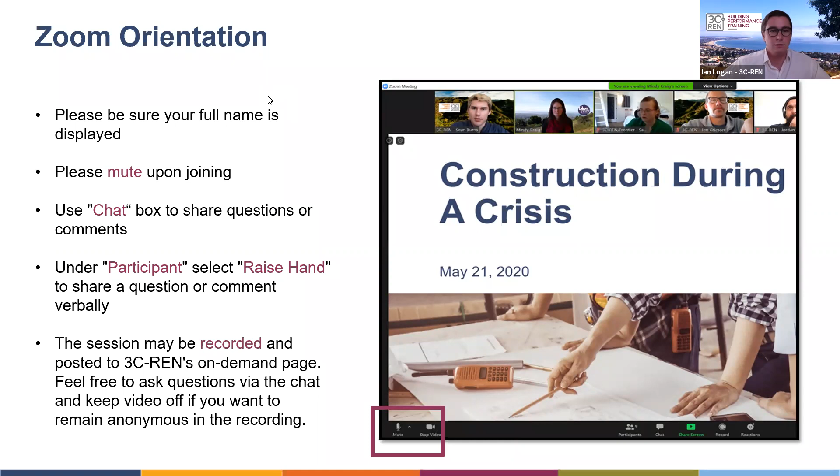Oh, I think, yeah, there are a few boxes that come through.

So just a few words about who we are. The Tri-County Regional Energy Network, also known as 3C-REN, is a collaborative partnership between San Luis Obispo, Santa Barbara, and Ventura counties. Our purpose is to improve energy efficiency in the region by offering free programs and services for all building professionals and households. 3C-REN is funded by ratepayer dollars that we all pay into through our utility bills via the public goods charge. The benefit of being ratepayer funded is that there's no cost to those we serve, and as a regional energy network, we're able to return those dollars back to our local economy, which has historically missed out on some of these funds.

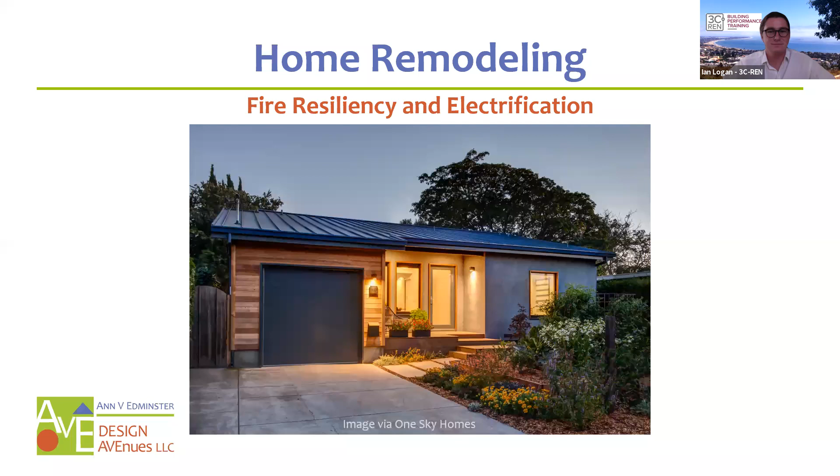So first, I would love to know who's in the audience. I know several of you. Welcome, friends. Ian, I think, will run this poll so we can find out who all's here.

Oh, you guys are quick. That's great. Okay, looks like almost everybody's voted. Some of you are trying to decide what you are. I can relate to that. Okay, we can call it here, I think. So interesting, we have a mix. Share results. Okay, I guess those are being shared. So about evenly split between homeowners, general contractors, architects, and others. Ian, do we have any answers in the chat box saying what the others are? Let's see, I don't see anything now. Okay, so we have mysteries. That's okay, maybe we'll find out more as we go.

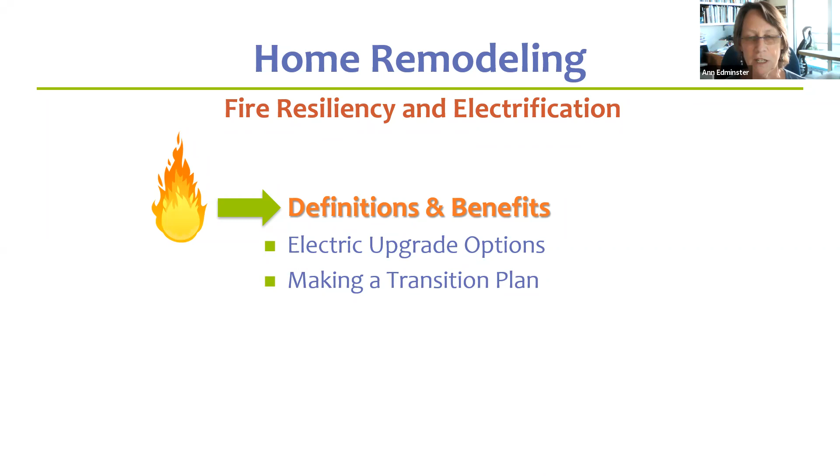Okay, so moving right along, thank you for filling me in on that. I've got three sections here this evening: first on definitions and benefits, then on the electric upgrade options, and finally making a transition plan. The second and third sections have a little bit of repetition in terms of the themes, but I'm giving more tips in the final section about the process. So that's the main distinction here.

So finally, it's late in my day, definitions. Electrification, what we mean by that is transitioning away from appliances and equipment that are fueled by natural gas or propane. You'll note that I've put 'natural' in quotation marks. It turns out that the terminology natural gas has really been used primarily by the gas industry to purvey the idea that this is something healthy, like natural foods.

Many of you probably realize that natural foods is a somewhat nonsensical term because there's no regulation around it. It's used to convey an idea without anything really being attached to it. There's no legs to it, no teeth to the definition. So the gas industry has really used this to purvey the notion that this is healthy, and what we know now is it's actually quite unhealthy.

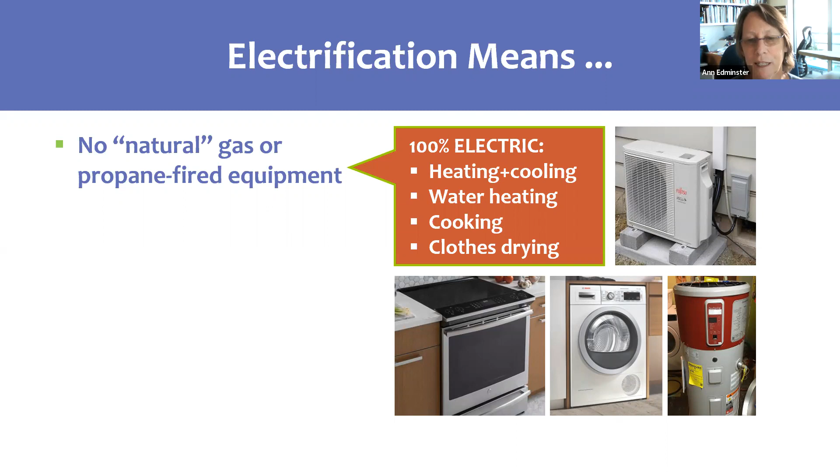So when we talk electrification, the four main uses in homes that we're talking about converting are heating with electricity, which generally means we're able to cool at the same time, water heating, cooking, and clothes drying. We'll be walking through all of those.

The benefits of electrifying are numerous. First, we're decreasing indoor air pollution substantially, reducing kitchen safety risks.

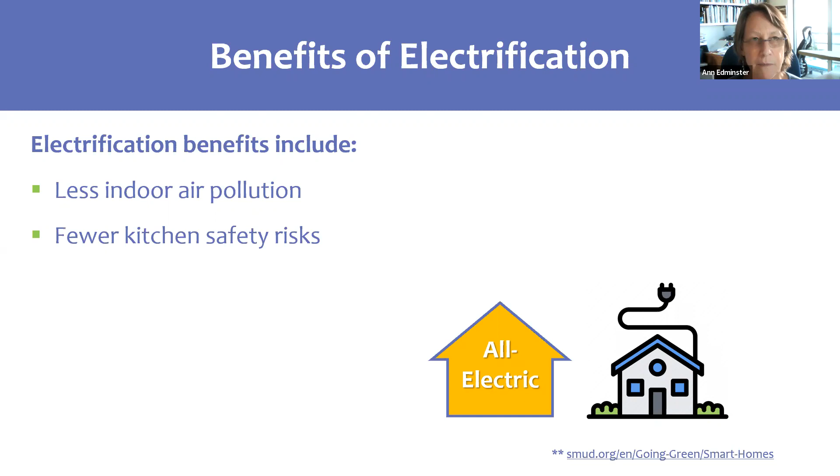Actually, my son came home from his job yesterday. He works with young people with special needs in their homes, and they had an episode where an older gas stove had been used and not completely turned off. Everyone went outside for a while, came back in after 20 minutes, and the whole house smelled of gas. It was pretty scary, and that would not happen in an all-electric kitchen.

There are numerous other kitchen safety risks that are reduced by going electric, and I'll probably talk about those multiple times because it's really a favorite theme of mine in the arena of electrification.

Improved equipment: anytime we're replacing older equipment with new, generally the equipment comes with newer, improved features, often with improved efficiency as well as better safety and many other nice things. Usually there are aesthetic improvements, controls improvements, features, and so forth.

I remember in my older home, when I first moved in well over 30 years ago, about 35 years ago, it was equipped with definitely older appliances. I celebrated the death of each one, because then I got to get something new that had many more features I liked.

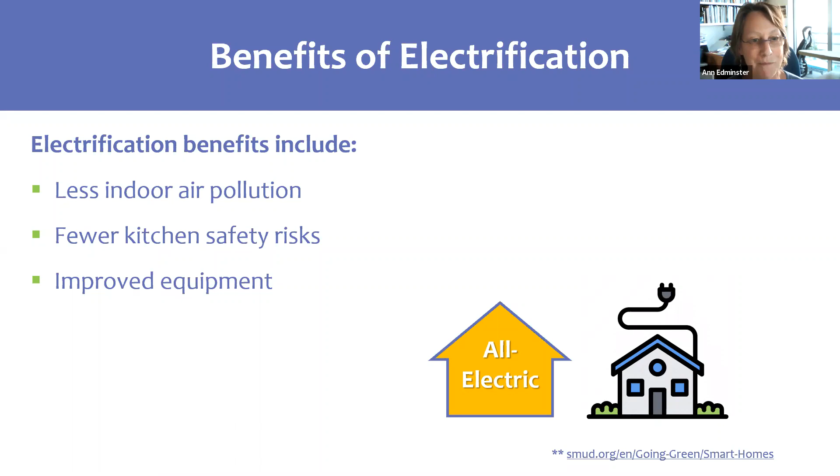This is certainly not the least important, although it may affect us in the most indirect ways: reducing greenhouse gas emissions is a big point of this, and it's why it's of such interest to 3C-REN and many of us, as we are in a climate crisis, as I'm sure you all know, all looking to find ways to improve our climate profiles. So an all-electric home is not an insignificant way to address that.

Going to an all-electric home means emitting about 40% less greenhouse gas than an equivalent home powered by natural gas. This research comes from SMUD, the Sacramento Municipal Utility District, which is one of the agencies within the state doing some of the most progressive work in this area. They've got a bunch of great resources, and the link is on this slide.

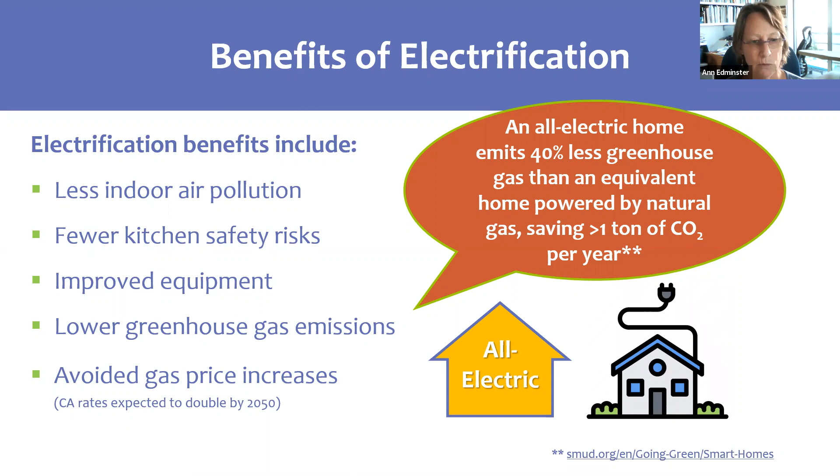What that's going to mean is less and less provision and maintenance of natural gas infrastructure, and the state will be diverting more attention toward electrification. So with fewer customers on gas, that means fewer people sharing the cost of maintaining that very expensive infrastructure. Really a critical piece of that.

Now, before we move into other specifics about electrification, I wanted to talk about efficiency. There are several reasons why efficiency is ideally, and whenever possible, a precursor to going all electric. We'll talk a little bit about that and its benefits.

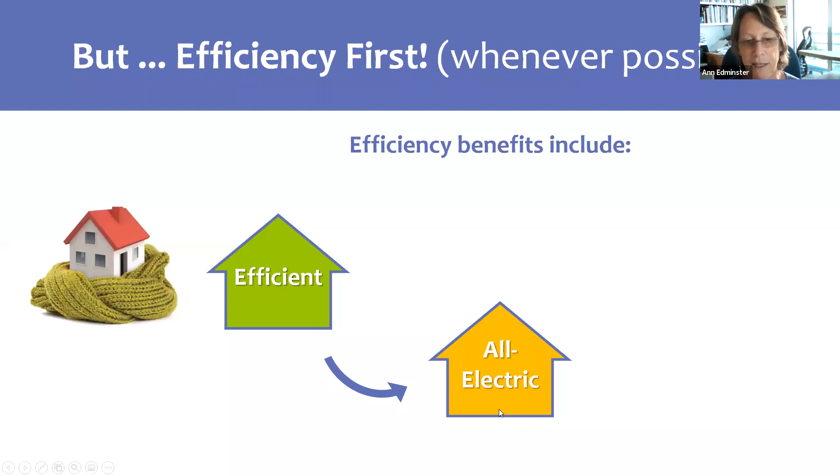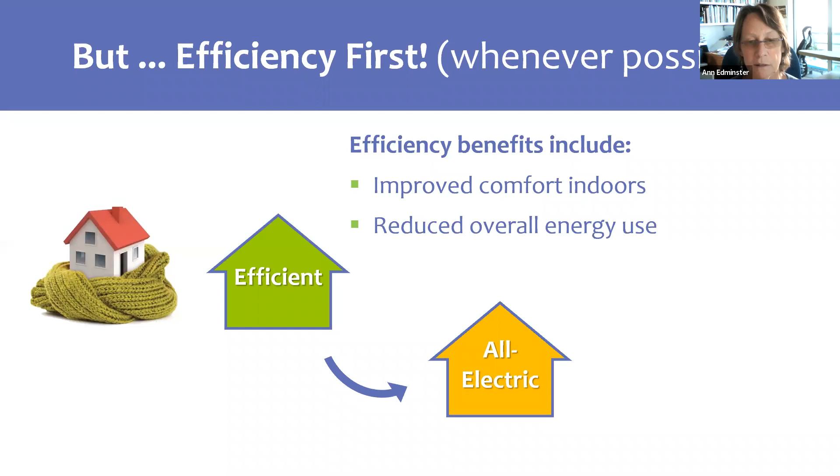First is improved comfort indoors. Whenever we make a building more efficient, particularly the enclosure features, we are improving indoor comfort, temperature stability, and so forth. We're reducing overall energy use, which brings costs down. And as I mentioned, with the inevitable electric rate increases, it's important that we don't just shift our energy use from one fuel to another, but also reduce it, because electric rates are typically higher than gas rates.

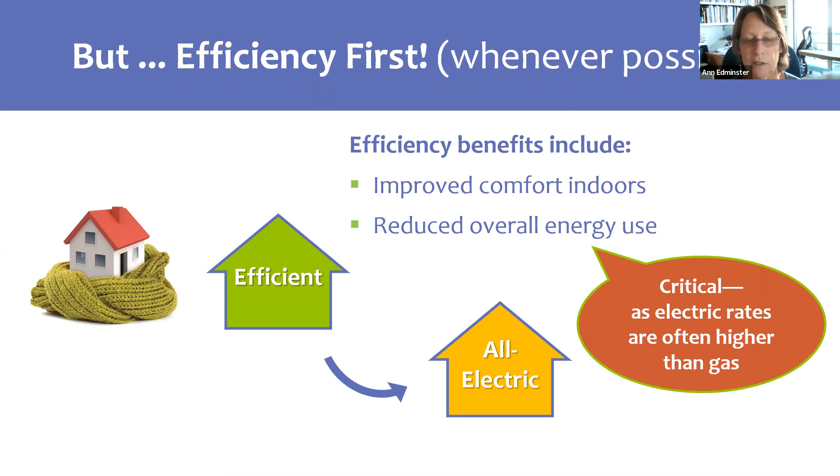So what we want to do is shift from one fuel to the other and at the same time reduce overall usage so that we don't experience adverse rate increases. And then the other really important aspect of efficiency is it improves resiliency.

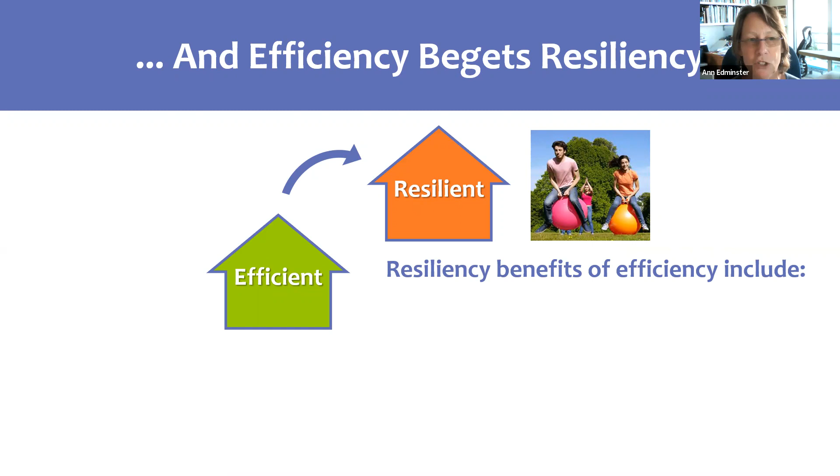So what do we mean by resiliency? It isn't playing in the park, although that's lovely. The benefits of efficiency that bring with them resiliency are stable indoor temperatures, which I already mentioned. Very important, particularly during power outages, which have become a feature of life for many of us here in fire-prone regions of California. And this is not just comfort, it's also a life safety feature, because with our increasing extreme temperatures, many people who have health challenges, who may be elderly, the very old, the very young are particularly vulnerable to extreme temperatures, as are those with health challenges. So this is not an insignificant thing.

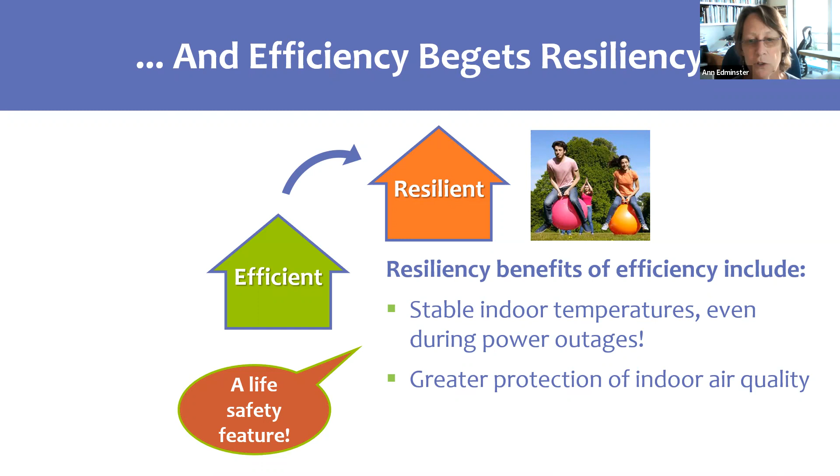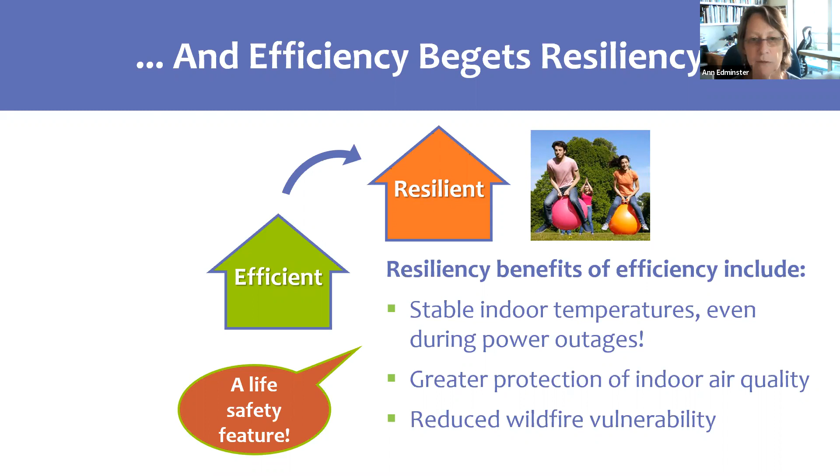We're also again providing protection of indoor air quality. The efficiency measures that we employ on the enclosure mean less intrusion of wildfire smoke or other types of air quality problems that occur on the exterior. There are also enclosure improvements that reduce not only the wildfire smoke intrusion, but the risk of wildfire per se. So I'll be going into several of those things right now.

This is a vintage 1970s home that was not constructed with a lot of attention to, honestly, either aesthetics or durability. The good news about that is when I was doing a lot of remodeling design, I used to tell my clients, think of demolition as opportunity. So when we see deterioration and things that need to be upgraded for a variety of reasons, they often open up opportunities to do things that have multiple benefits.

So in this particular case, the T111 siding is in very poor condition from nearly a half century of exposure to UV and driving rain and wind and so forth. So the owners are up for replacing that siding. Taking off the siding gives us the opportunity to air seal, which again is both a thermal benefit and a wildfire protection benefit, again, mostly smoke.

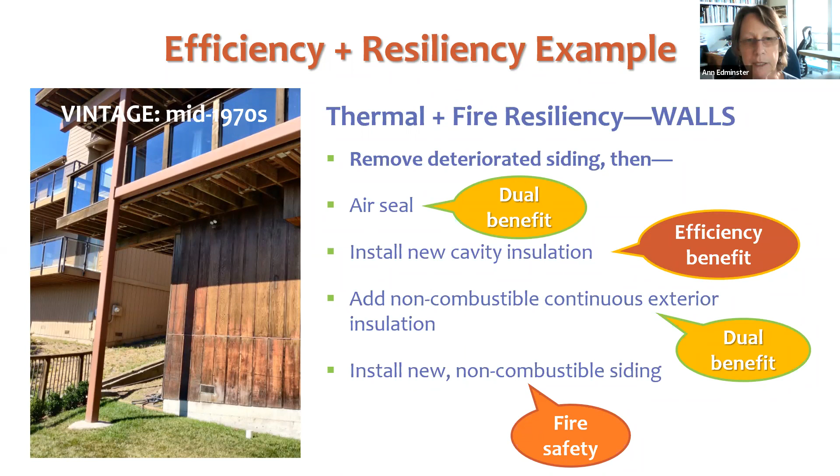A little bit more in the enclosure, we're also looking at the glazing here. In this particular home, there was a combination of single pane glass and dual pane glass. However, even the dual pane glass, these were not thermally broken units, and they're pretty aged and are not well fitting within the window rough openings. So there is air leakage, which again means smoke leakage.

So this homeowner is in the fortunate position of being able to afford window replacements, and so that's what's happening. All of the windows, even the dual glazed, are being replaced with dual glazed tempered wood windows that are clad with metal for durability, and all of them have compression closing.

So the dual glazing is both a thermal benefit, which probably you all know as compared to single glaze. What you may not know is that dual glazing also is more fire resistant than single glazing. Tempering the glass, particularly both panes, further increases fire safety. And then avoiding vinyl in particular is important for fire, because vinyl in the face of fire melts and deforms, and the deformation not only destroys the windows, but again allows heat, smoke, and flame intrusion.

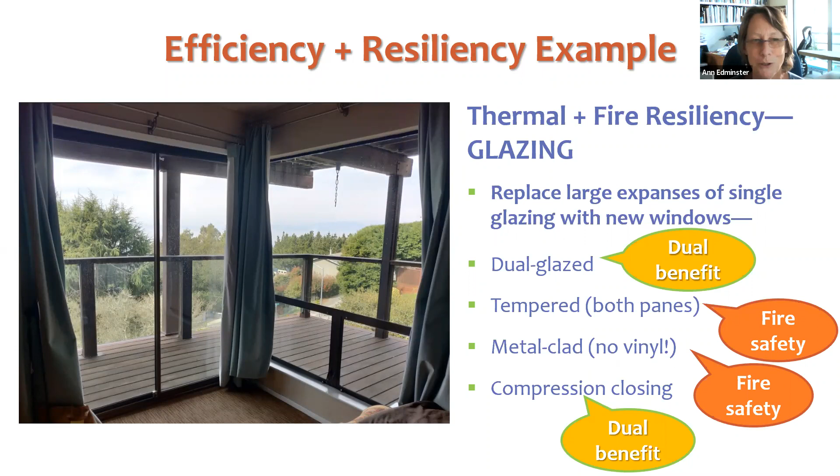So that's a little tutorial on glazing and why it matters from both a thermal and a fire perspective. Time for some water.

Yet another aspect of the enclosure that we can improve is the venting. In this home, we're going to be eliminating the vents both in the roof and the crawl space. This, again, is a dual benefit—you'll hear me singing the same song over and over again. It improves the thermal performance of the home, and it also reduces the opportunities for the intrusion of smoke, embers, and flames.

When we convert a crawl space, basement, or roof from a vented to an unvented space, what we need to do is actually change where the insulation occurs so that the enclosed space is now insulated. In the attic, we move the insulation from the ceiling plane up to the roof plane. In the crawl space, instead of insulating under the floor, we insulate the crawl space walls. What we now have are what we call semi-conditioned spaces—we're not directly heating or cooling them, but they'll inherently be cooler in the summer and warmer in the winter than when they were uninsulated.

This makes them really great places to put heating and cooling systems, which will perform a lot more efficiently than they would have previously in those uninsulated spaces.

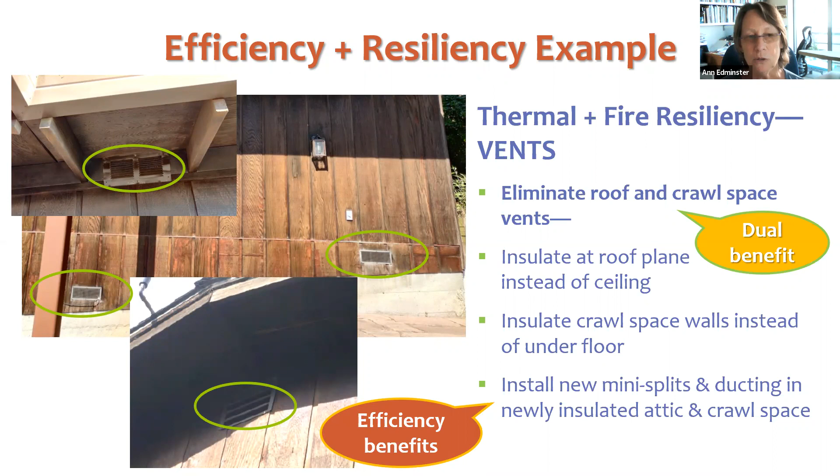At the same time, an additional goal for this homeowner was to electrify. We're replacing their existing natural gas water heater, which was in the crawl space, and their existing natural gas furnace, which was also in the crawl space, exposed essentially to exterior temperatures and therefore really compromising performance. We're putting in new mini split heat pumps—one in the crawl space and one in the attic with the ducting. They'll all now be in this semi-conditioned space and operating much more efficiently than their prior counterparts. There are a lot of synergies in looking at these systems together and seeing what the opportunities are.

Moving beyond the enclosure to ventilation as distinct from venting: venting is basically poking holes in things and letting air move in and out. Ventilation is actually thinking about how we supply fresh air for us to breathe within homes. This is often a source of confusion for homeowners.

Another opportunity afforded by creating these new semi-conditioned spaces is to put in ERVs, energy recovery ventilation systems, or HRVs, heat recovery ventilation systems, into these newly conditioned spaces. This is very important because now we can provide filtered fresh air rather than incidental or unfiltered fresh air, which is what we often get when people say, 'I can just open the windows to get fresh air.' Well, not in smoke season, you can't.

We're finding more and more people interested in active ventilation systems than ever before. One concern that often arises is: if I'm running a pump to move fresh air in and out of my home, doesn't that have an energy penalty? But it's not what you might think, because in our older, less airtight homes, we've been getting air movement between interior and exterior by passive, unintentional means.

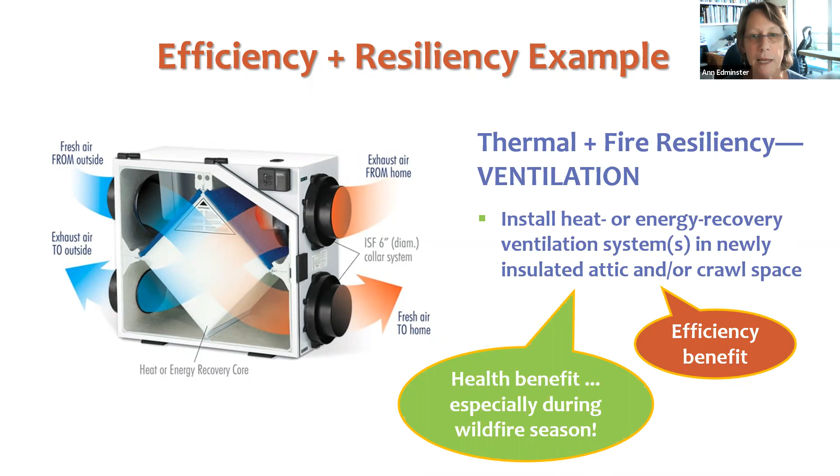In our older homes that were not air sealed, there are lots of small, sometimes not so small, places where air is leaking in from the exterior. But we don't know how much air we're getting, we don't know the quality of that air, and we don't know the quantity. So it's not really a great way to provide air for our breathing. This is another opportunity created when looking at these types of retrofits.

We have a quick question from Craig Lewis. He's asking if most jurisdictions allow unvented attics.

That's a great question. They absolutely should, because this is perfectly permissible by codes nowadays. In the past it was more of an issue. There are definitely still building officials and inspectors who are not completely up to speed with unvented spaces. So it's not a bad idea to have a preemptive conversation with your local building department if this is something you're planning to do. If you get any resistance, it's not too hard to come up with supporting information, code sections, and technical resources to make the case that this is not only permitted, but desirable. One really great resource is buildingscience.com. They've got a ton of authoritative information that can be used in conversations with building department folks.

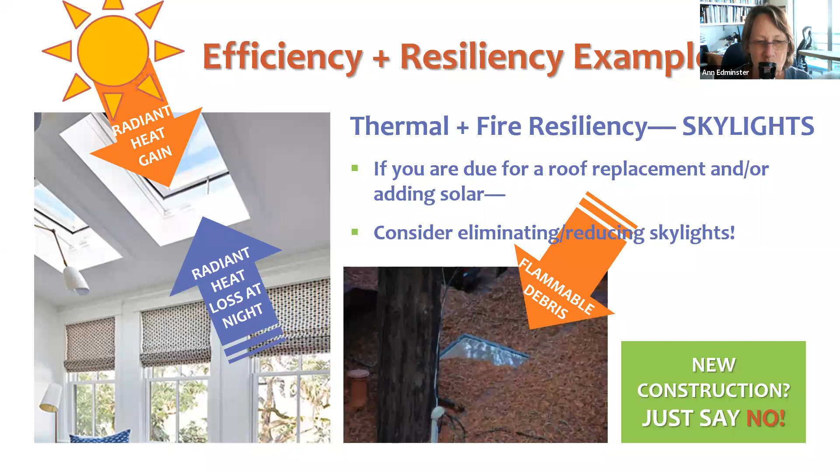I'm wondering if I've got a little air quality problem that's making me hoarse. At any rate, going to an all-electric home also inherently improves resiliency.

So what are the benefits here? We get power restored much faster after outages than with gas fuel. I know some people say, well, if I go to all electric, I'm not going to be able to cook when the power goes out. That may be true. However, when we lose power, we often also lose power to our gas appliances because most of the new ones have electronics so that they can't really be used effectively in a power outage.

Furthermore, when there are the types of emergencies we've been exposed to in recent years, we're often looking at gas shutoffs as well as electric shutoffs. The experience is documented that restoring electric power, depending on the nature of the emergency or outage, can be in the range of a few hours to a few days. The time to restore gas service is in weeks or sometimes months. So again, sort of little known facts about this. When we eliminate gas, we eliminate on-site explosion risks.

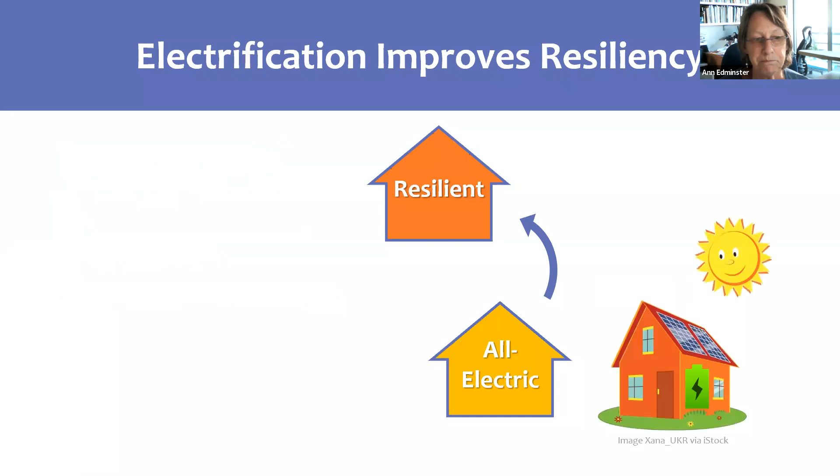If we also include distributed energy resources, meaning solar and battery, that's the optimum combination, because then we have not only utility savings month over month from having those solar resources, but solar also provides an increase in resale value that averages about 4% nationwide, plus clean carbon-free energy.

And with batteries you get power when the grid goes down. Even without batteries, there's often the ability to provide power to limited items within the house just with solar.

Boy, I'm really sorry about the hoarseness.

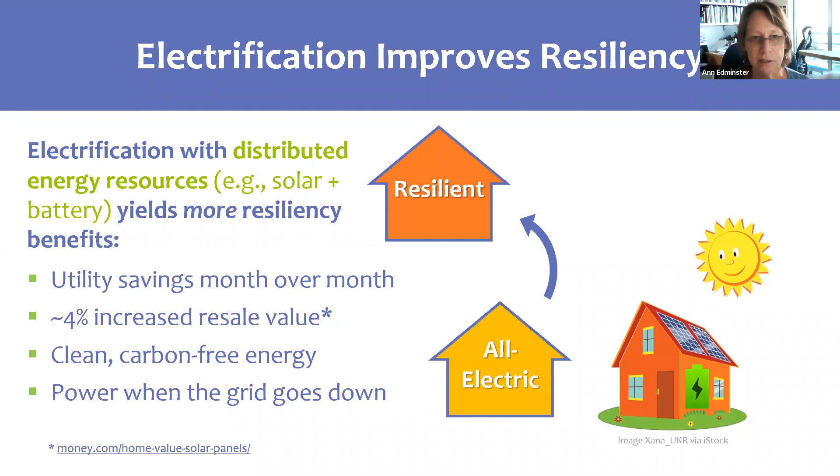This is not fun. At any rate, I think I've shown that there's a real win-win in looking at efficiency, resiliency, and electrification together. So I just really want to encourage that holistic thinking.

Moving on to the electric upgrade options. Before we do that, Ian, are there any other questions that might be addressed before I launch into this new section? Yeah, we have a couple quick ones.

Another one from Craig: is there a significant insulation efficiency difference between roof plane, ceiling batt, and blown attic cellulose?

Great question. Generally speaking, I'm not a huge fan of batts. Not that a good job can't be done with batts, but I'd say batts are a little bit more vulnerable to installation defects that occur primarily from installers being pressured for time and working too fast. And because batts are challenging, they're 14.5 inches wide to fit in framing cavities.

But anybody who's looked at a newly framed house will tell you that the number of cavities actually 14.5 inches wide is quite small, because of all the things being done in home design and building, and also because of disruptions in exterior walls with wiring, plumbing, and so forth. So I'm not a big fan of batts for that reason.

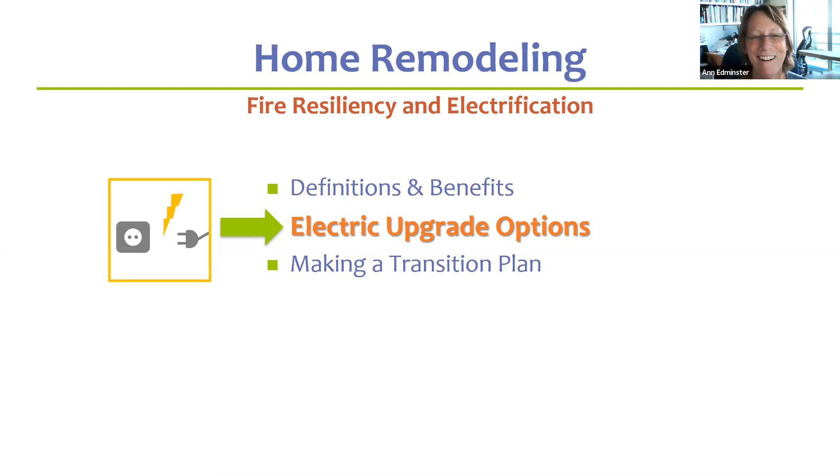So we're looking at the principal systems I mentioned earlier, and a couple of bonuses here too. For space heating, essentially there are two options, both of which are heat pumps.

And of course, when we're talking about electrifying, by definition we're talking about existing homes, since if we're starting from scratch, we're not converting to electrification—we're hopefully going to start with all electric. But that means we're looking at how to get these things installed.

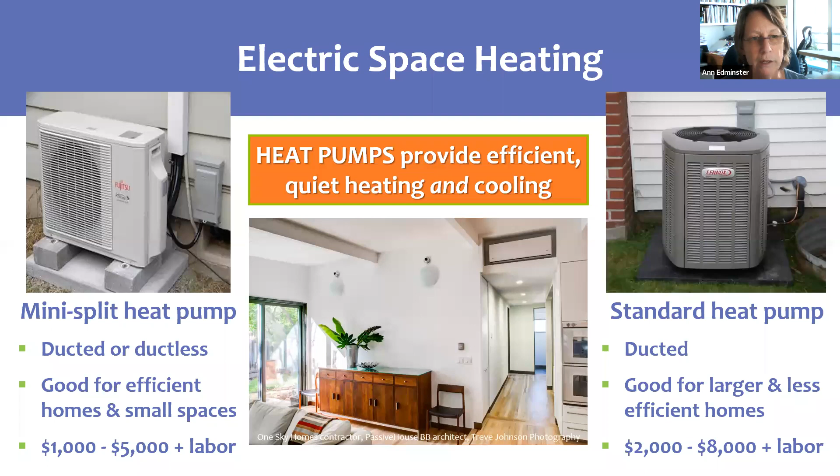Conversions—either option provides efficient and quiet heating and cooling. For a home that's got natural gas or propane heat, we have many of these in California coastal zones where there is no cooling presently, and yet increasing temperatures are causing more and more people to wish they had cooling. So there's a real opportunity to replace a furnace with a device that provides both heating and cooling. So that's our first option, our first piece of equipment.

The tankless is often referred to as instantaneous. This is somewhat erroneous, in that it's only instantaneous or really quick if it's mounted in direct proximity to the place where the hot water is needed. There's a lot of misunderstanding about tankless units on the market. I think they're often viewed as a panacea and sold as an across-the-board green solution, when the reality is they really need to be tailored to the installation.

So if they're installed as a replacement for a tank unit, there can be significant performance challenges if there's quite a bit of travel distance between the tankless unit and the hot water draws. There can be real disappointment when the hot water isn't delivered, quote, instantaneously. The other big deal, of course, is they're much smaller, which can be an important feature that lends them to particular spaces.

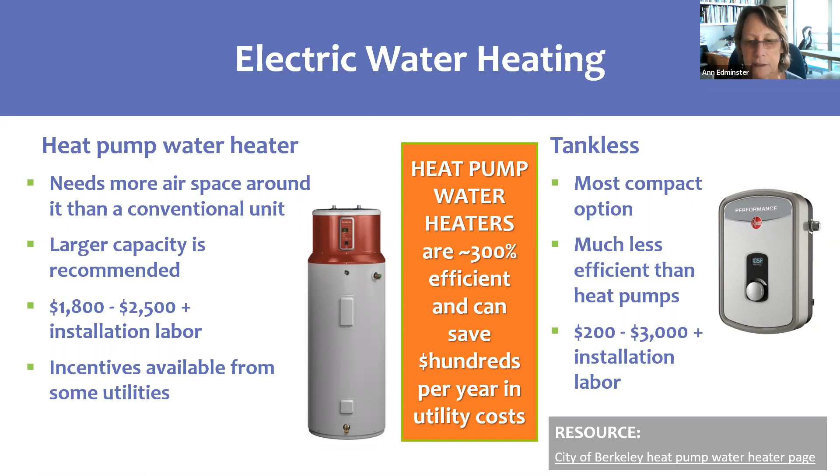Okay, moving on to induction cooking. Now, it's certainly true that a conventional electric range is also a possible swap-in for a gas range, but I'm not even including those, because most people, when you even mention the prospect of cooking with electricity to them, scrunch their face up in a very unhappy expression, because they've had experiences in the past with conventional electric coil ranges, which I don't think too many people really enjoyed cooking on.

So I think this is really one of these, I hesitate to call it a wonder technology, but it really is a quantum leap beyond prior home cooking ranges. So I'm a big convert, you maybe got that idea already. I've been cooking with an induction range for the last 2 years and will never go back.

Of course, my primary motivation was because I wanted to be in an all-electric, emissions-free home. But I've also been really excited and not ever remotely disappointed with it, because it's so much cleaner, so much safer, way less air quality problems, better controls. There's a cooler kitchen and cooking environment that comes with this. So there's absolutely nothing bad to say about this.

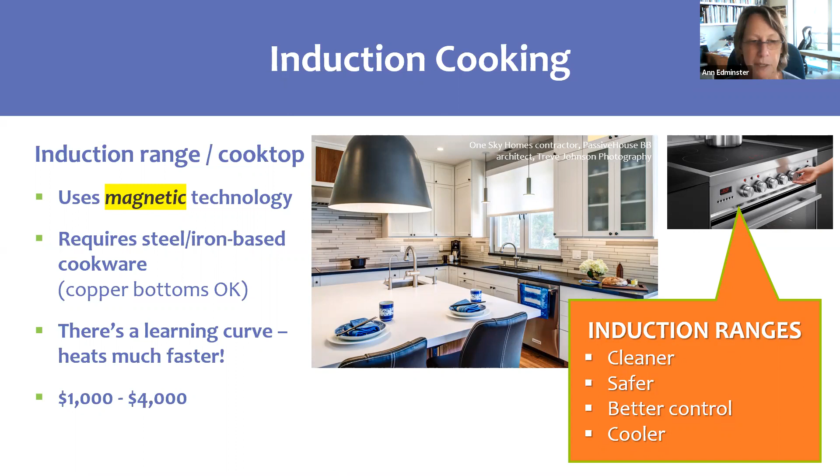Whereas on our older ranges, they're not nearly as responsive, so it's a lot harder to say, well, did I get the right setting? Did I drop it too much? Did I not drop it enough? So anyway, I'm a big fan. And in the last few years, 2 or 3 years, Consumer Reports, of course, reports on ranges. In the last couple of years, all of their top marked ranges are induction. So that'll tell you something about the general state of the art in cooking technology.

Moving on to clothes dryers. Once again, we have 2 options available to us, a standard electric and a heat pump. Standard electric behaves pretty much exactly as you would be accustomed to with a gas dryer. And a heat pump, same basic behavior, except that with the heat pump technology, it's quite a bit more efficient, so uses about half the energy.

However, there is a corresponding increase in drying time. On the good news side of that, that means it's using a lower heat, and so that's gentler on clothes. So if there are a lot of delicate clothes being used in your household, then that could really be a benefit. Also, they don't require venting, so that could also be a benefit if there are some installation constraints.

And of course, just the visuals, a dryer is a dryer is a dryer. So it's not going to really have any effect aesthetically, although I think probably most of us don't think a lot about the aesthetics of our laundry equipment because we're tucking them in corners and closets for the most part since they're not super lovely objects.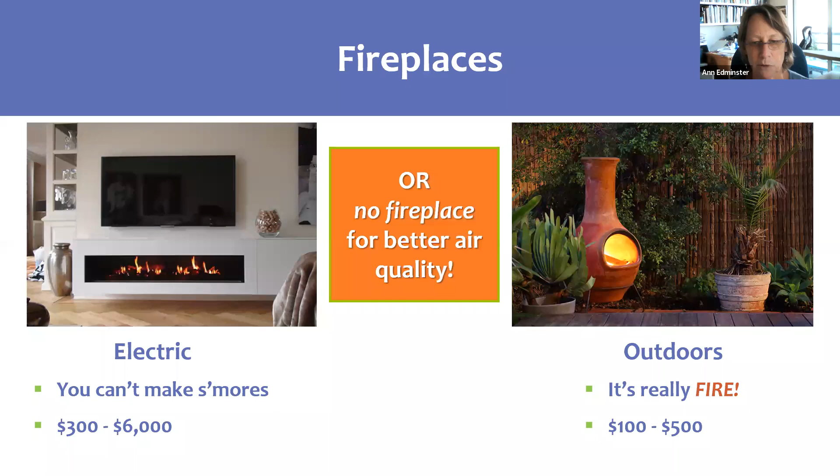But if you really want a true flame experience, I would say take it outdoors where you won't have an indoor air quality disadvantage from that. And you can actually make s'mores on it, unlike the indoor option. So more limited, but I think we're all after a different type of aesthetic experience when it comes to a fireplace. Just want to offer some different perspectives on that.

Now, on the more technical side of things, for heating pools and spas, we're not all fortunate enough to have pools and spas, but there are a lot of them out there. And there's more and more emphasis on converting those units from heating with natural gas or propane, which is quite typical, to heating with heat pumps.

This is an area that is really emergent. So there's not yet a lot of experience and therefore not a lot of expertise in doing pool and spa heating with heat pumps. However, we've got some early stage projects that are starting to prove this out. We've got a handful of very competent mechanical engineers who can help with this for folks who really are committed to decarbonizing their homes completely.

I worked on a project a number of years ago, probably a decade plus, where the owners wanted to do exactly this and initially started working with an experienced pool designer from a different part of the country.

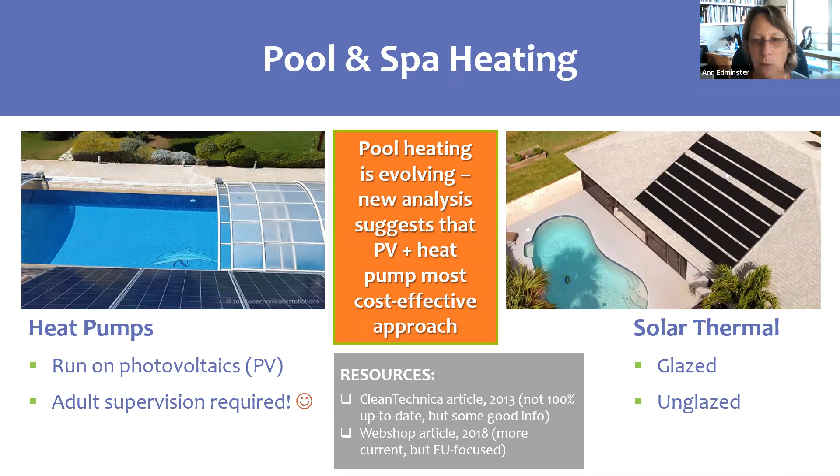Now, renewable energy isn't really part of the efficiency equation, but I want to mention it again. There are two opportunities for acquiring renewable energy. The obvious one is an on-site solar system of photovoltaics for solar electricity. But also, more and more energy providers statewide—both conventional utilities and, in many regions, community choice aggregators—are offering 100% renewable energy, or very close to it, through a premium option.

In my home, I have both. I have on-site solar, and that covers about 60 or 70% of our load—the home was built with that system. So rather than buying additional photovoltaics, we upgraded to the community choice aggregator's premium 100% renewable option, and in our case, locally produced energy, so that we have 100% clean energy.

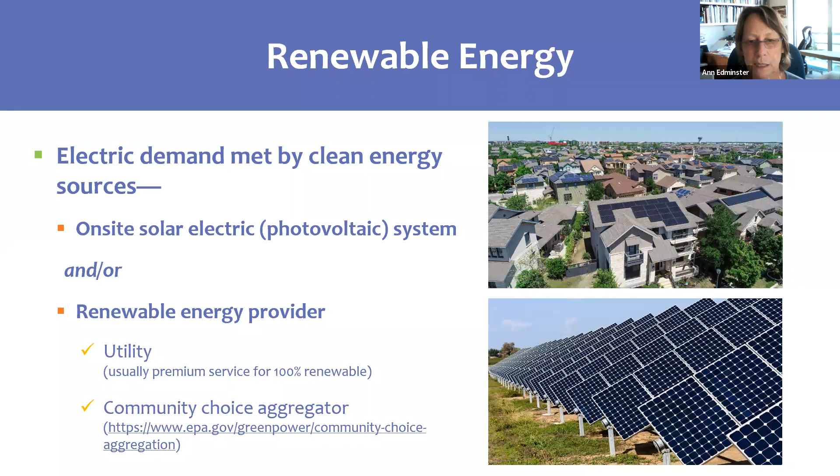I think we're really fortunate, those of us in California, that the community choice phenomenon is spreading rapidly and giving us many more options than we had just a few years ago. It's a really exciting transition we're seeing in the energy industry.

And then batteries—the primary benefit that's top of mind for most people is having backup power available for when the grid goes down, either for critical loads only or, in some cases, for the entire home. Most battery systems now can be programmed to prioritize the critical loads and/or to balance this backup power capability with what's called solar self-consumption.

And then in the case of a planned power outage, the programming in the batteries can instead be preferenced to not go into that self-consumption mode, but instead to conserve all of the stored energy for household needs during the outage.

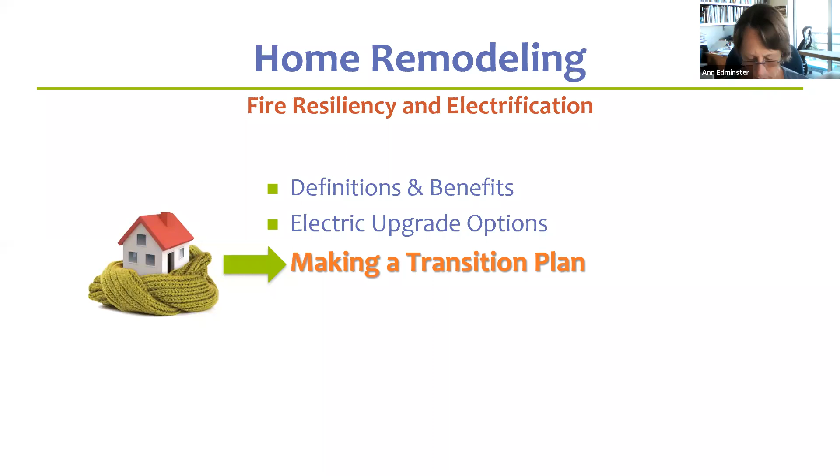Okay, here we go. So if you're thinking you're going to electrify, most people don't have the luxury or the appetite to do it all at once. So what I've done here is outline the sequence that makes sense to me, with the caveat that every home is to some extent unique. Every household is certainly unique. So these are not meant to be 100% prescriptions, more a way of thinking about it and then customizing to your own situation and needs.

So what I would recommend first is to think big picture: electrifying, first of all, the four standard equipment items we ran through, and perhaps some of the others. But are you also maybe planning on some electric vehicles in your future? Electric vehicles, including e-bikes, for example. All of those are going to add electric load. And are you maybe considering battery storage? So think about all of them, whether or not they're in your short, middle, or long term future.

Then once you have a sense of your ultimate destination, electrically speaking, I say go after some of the easy pieces. It's pretty easy to swap out lighting. For those who have not yet gone to LEDs, the improvements in LED technology over the last even 5 years has been stunning, really dramatic. Early LEDs, for the longest time, it was actually really hard to find LED fixtures. And then they came along and they were really disappointing, both in terms of lighting quality and aesthetics of the fixtures themselves. Now there's just a ton of options, including very affordable and quite nice looking fixtures from myriad sources. So there is, in my view, no reason at all to hesitate on 100% LED conversion.

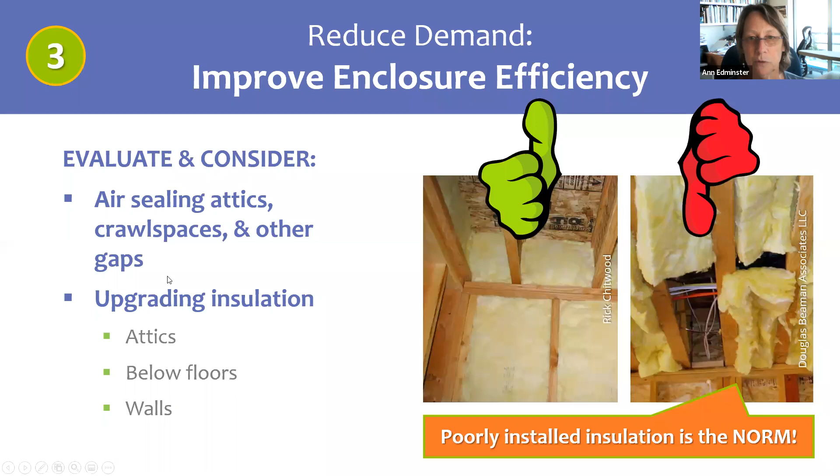So a lot of folks, even outside the industry, have gotten accustomed to using the language of R factor when talking about insulation. It stands for thermal resistance. And when we talk about wall, floor, ceiling insulation, R values, a bigger number means more thermal resistance or better thermal performance. So for example, we like to look at an R value of, let's say, 40 and above as great for attics. Say around 20 is pretty darn good for walls and so forth.

Well, U factor, because it's the inverse, means a smaller number means better performance. So don't ask me why - I often say that the building industry is the logic-free zone. So welcome to the logic-free zone, as this is your first exposure to the way we do things here. At any rate, a 0.3 U factor is probably the highest I would recommend for any California climate zone, and down in the 0.2 something - 0.27, 0.24 - is even better.

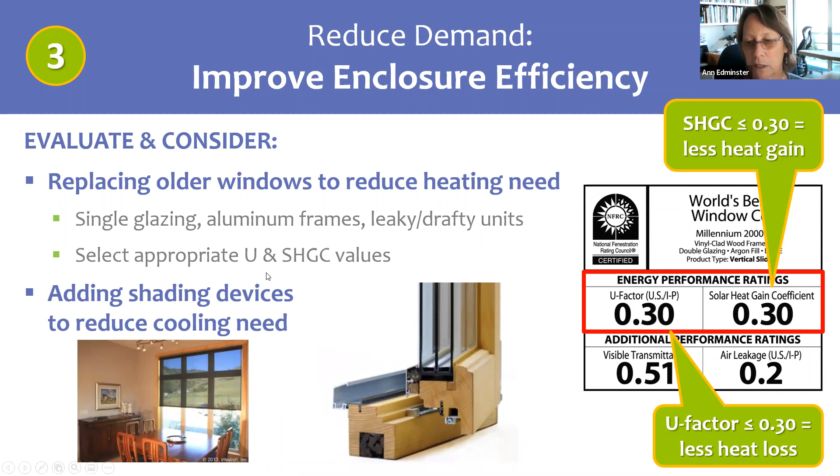Okay, and of course, shading devices can also be tremendously helpful in reducing our cooling needs. So again, west-facing exposures are usually our biggest issues in California climates, or unshaded south exposures. So those are the areas where I would encourage you to look at shading opportunities.

Once you've done all the improvements you can make to the demand imposed by all those electrical things in your house, and done what you can with the enclosure, then we need to ask how much electric capacity you need now and in the future. Here's where we refer back to the list of electric things you may add later, because if you upgrade your electrical service once, you definitely don't want to do it twice. So it's important to consider whether you'll need a new panel—if you're at 100 amps going to 200, or if you're at 200 going to 400.

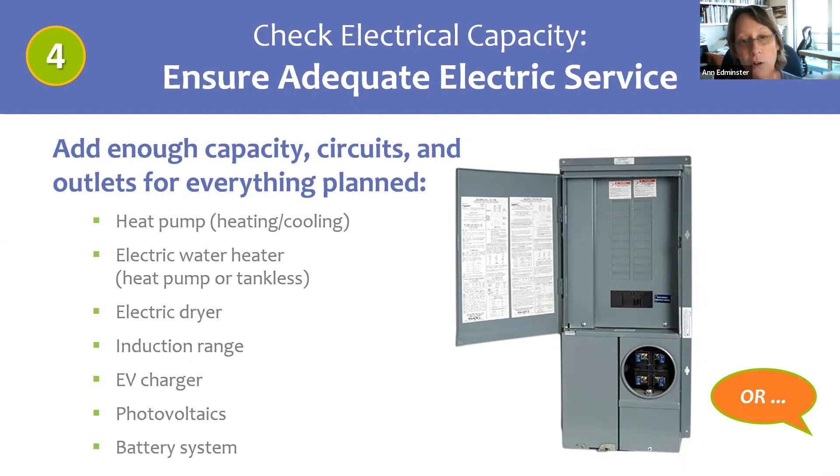So probably more, because this is an area with a huge amount of work being done in the energy industry right now, to address the compelling need to electrify the thousands, tens of thousands, hundreds of thousands of existing homes that presently have natural gas and propane service, so we can reduce our climate emissions and hopefully preserve a reasonable climate for ourselves and future generations. It's really amazing the amount of work being done in this realm right now—we're seeing fast evolution. It's really quite inspiring what's happening in this space. So something to keep in mind.

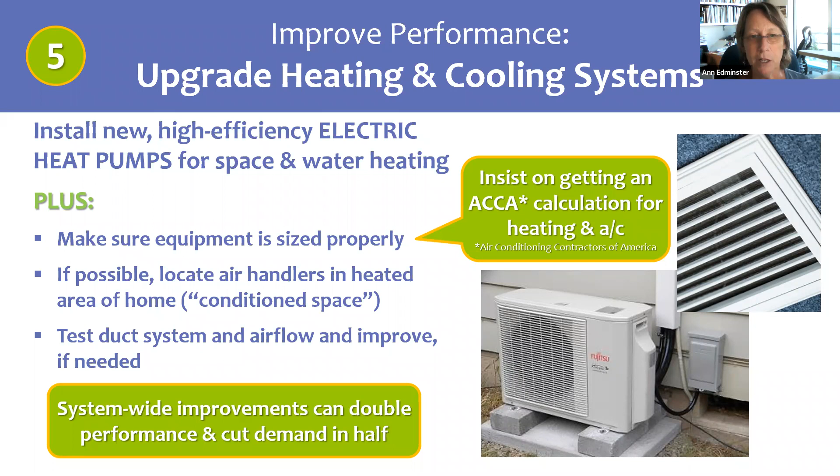Also, again, look at the system as a whole and other parts of it for opportunities for improvement. Then finally, once you've dealt with all those more challenging systems in the house, look at renewable and battery opportunities. I mentioned both installing on-site systems and looking at utility providers' plan options. It's worth mentioning there is still a 26% federal tax credit available that applies to both solar and batteries, and there may also be local incentives through your utility or community choice aggregator. So it's really important to look at those.

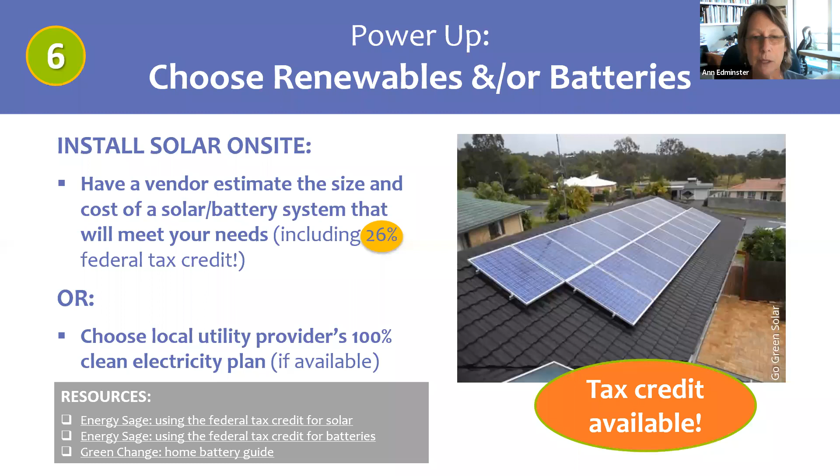So if you're not in a bracket that allows you to consider the full price tag for the larger unit, it doesn't mean that battery backups are out of the question for you. It just means looking at some of these more modest systems. I encourage you to look at those.

The last thing, besides walking through that set of planning steps I outlined, is to think about phasing. You probably can't do it all at once or in an ideal sequence. So it's really helpful to look at how long your existing appliances are likely to last, and maybe replace some of them preemptively if they're approaching the end of their natural lifespan.

Because what happens, let's say if you're looking at a furnace that's 12 years old and its life expectancy is 18 years, a failure could have you without heat at a very unfortunate time. And secondly, the cost to repair could go pretty far towards buying the replacement. So it's really smart to learn more about our appliance ages, because we tend to just wait until they fail. We're not taught to think about this ahead of time.

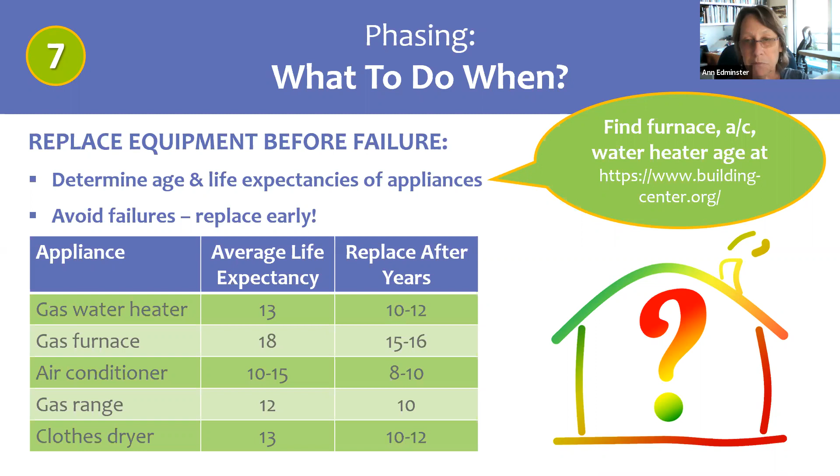One of the resources I've got for you is in the green bubble in the upper right, which gives you a rubric to find out the age of your furnace, air conditioner, water heater. I suspect there are similar ways of decoding the ages of your other appliances with a little sleuthing online, because most of these appliances have their age encoded into the serial numbers. So that's a little known secret.

The other thing to think about is, are there some natural synergies that might occur? A really important one is that anytime you get a trade contractor on site at your home, there's a mobilization cost. They're spending time to drive out to your site, learn about your home, talk to you, maybe do some negotiations, and then return travel time. So the more work you can have done in a single visit or contract, the more cost effective it's going to be for you. That's one way of thinking about this.

I've got several other potential synergistic things you could think about too, about buying an electric vehicle. You're going to have significant fuel savings. Could some of your budget that currently goes towards vehicle fuel go towards some of your upgrades if the timing on this works well for you?

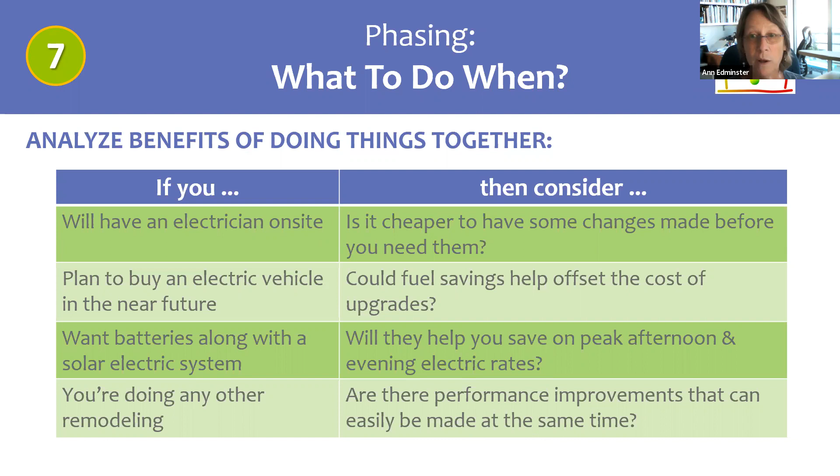And maybe the final one here, any other remodeling. Most people don't remodel exclusively to save energy or reduce carbon emissions. They have other architectural objectives they want to achieve with remodeling. And yet those goals may open up great synergies and opportunities to do things that will also improve energy and carbon performance. So be sure to talk to any of your design professionals and family members about what things might make sense to do together.

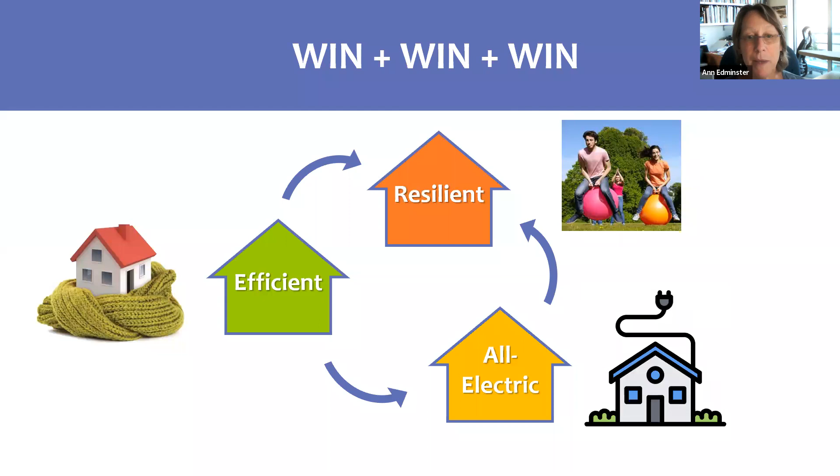Once again, I want to emphasize that thinking about these things holistically has many, many benefits, and I encourage you to be planning ahead and thinking creatively.